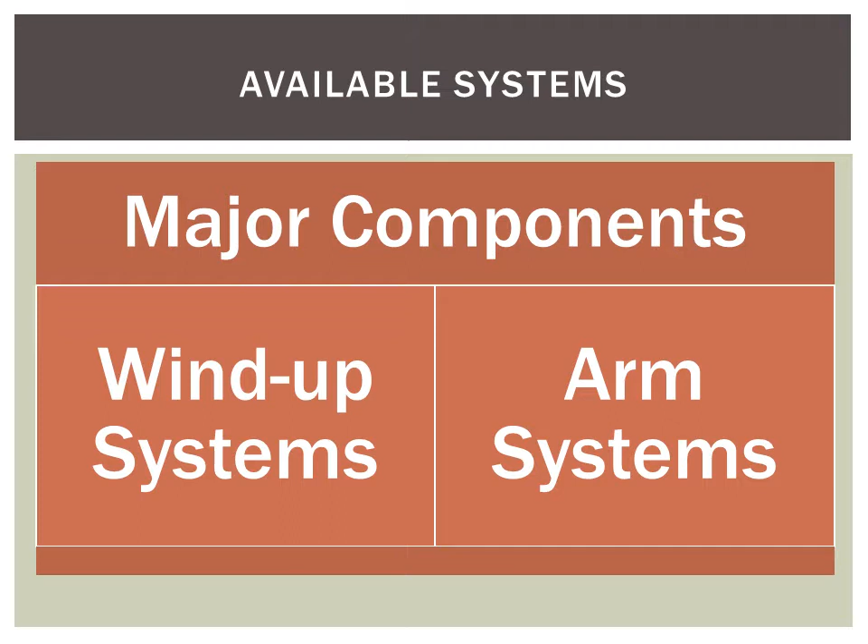As far as the arm systems go, there's steel, there's aluminum, and even different options within the aluminum systems. So that's why we try to let you take a mix and match approach where you can put together whatever combination of wind-up mechanism and arm system that you desire. All right, so the major components, first, like I said, is the wind-up system.

So over here you can see we have manual systems, and the pros to that is a lower initial cost, and there are fewer parts that could fail. But the cons of that are decreased productivity, higher long run cost, higher risk of injury to the user, and for a business owner, higher risk of lawsuits and/or workers' comp claims.

Moving up the ladder, you could upgrade to an electric system, which I would personally recommend, especially if the dump truck or dump trailer is in use all day, every day, if that's how you earn your living. The pros are increased productivity, lower long run cost. If you can pick up one extra load a day, think about the revenue that you get on your average load. Upgrading to electric will probably pay for itself in just a number of weeks. So it should have a high return on investment.

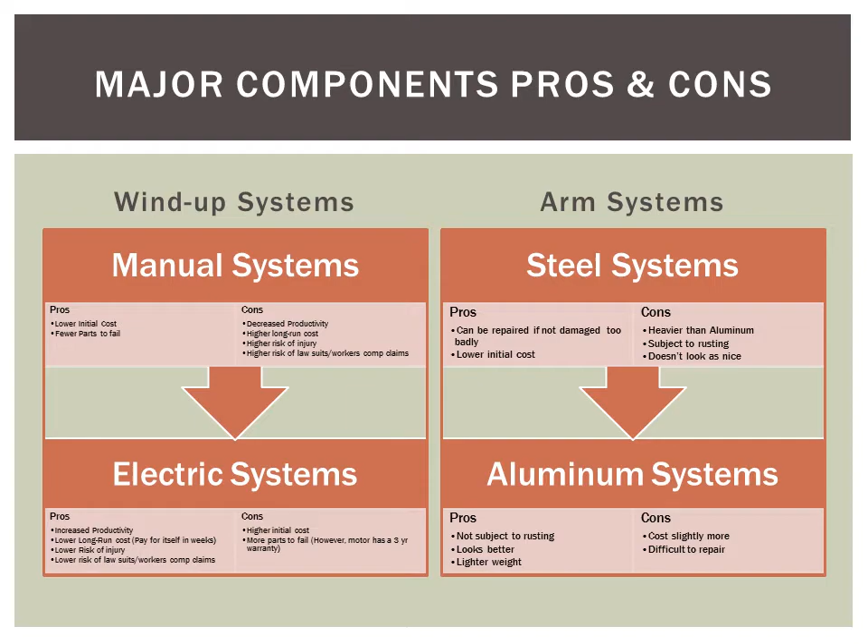The aluminum systems, which would be my recommendation in most cases, are not subject to rusting. It looks sharper on your truck, and that's the image that you present to your customers and to the public. And it's lighter weight. The drawbacks would be it costs slightly more on the front end, and they're difficult to repair if they get damaged. But choosing the right system can help avoid any damage to begin with.

An expansion of our major categories: at the top left quadrant here, you'll see the manual systems. You have our 1200, which you'll see in a subsequent slide. That and the 1500 are just basic wind-up systems. I'll go over the differences a little bit later. The 1600 is similar to the 1500, but it has a chain and it drops down and you can use it from the ground. The 1700 is your window shade type unit for people who prefer those kind of units.

Your electric systems are in the lower left-hand quadrant here. You have the 2600, which is your basic electric system for small to medium-sized dump bodies, and then you have your 3500 and 3800. On the arm systems, in the upper right quadrant here, we have two options. They're both robust steel systems that we have been selling for many, many years. We've been selling this system or something similar to it for probably a couple of decades now.

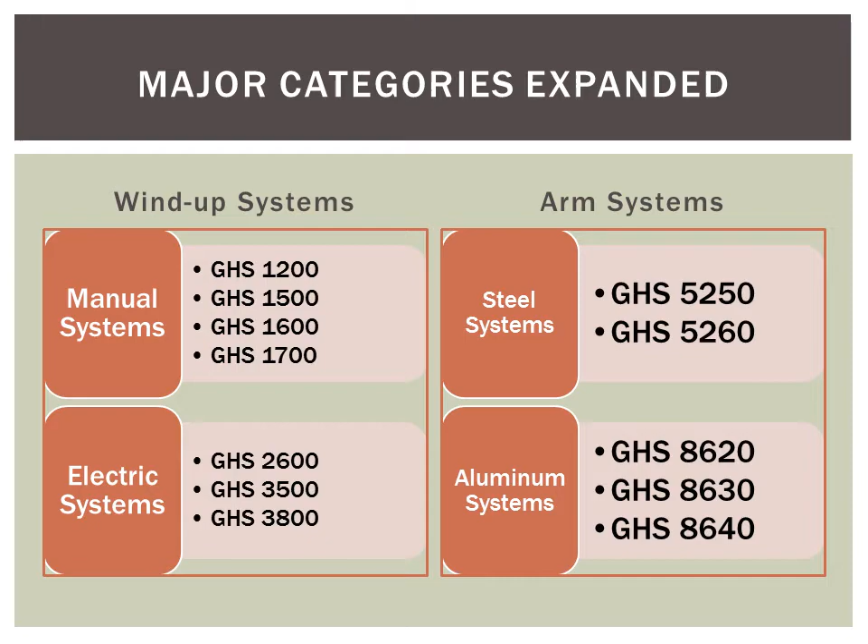So first we're going to cover the front wind-up mechanism for your tarp wind-up system. First here we have the GHS 1200. It's a manual wind-up system. You will see here that it has no sprocket or pawl, or dog as some people call it. This is a very basic system for like a landscape trailer.

It's not meant to be used with an arm system that's spring loaded because it doesn't have the sprocket and dog. The handle, which you see here, can do what they call freewheel and sort of spin around when the tarp's being pulled off. And that can be a little bit of a hazard. So for that reason, I would not recommend this for use with an arm system, but just like a landscape trailer.

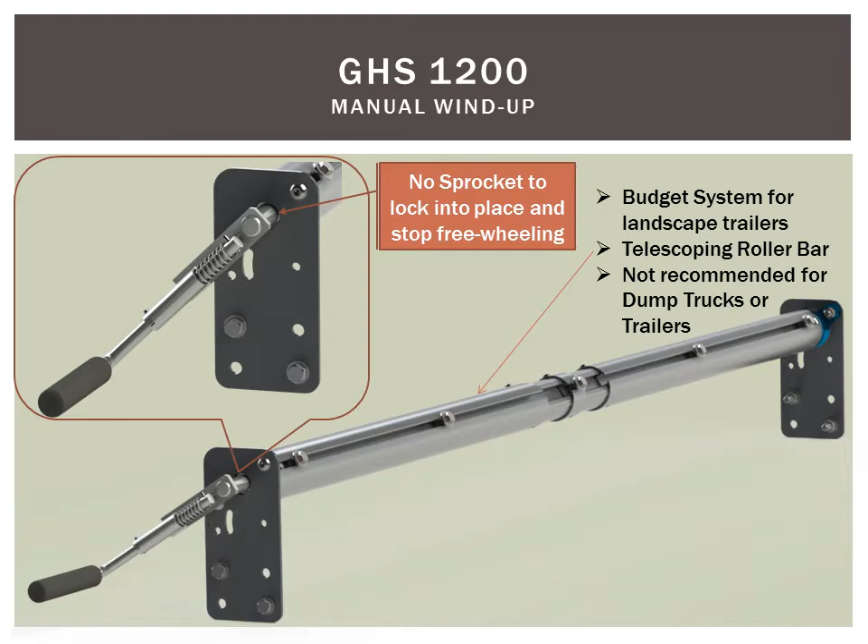Next, you have the GHS 1500. This, in my opinion, would be recommended for people with trucks that don't get all day, everyday use. Maybe they're farms or something, and they use the truck 4 or 5 times a week.

You wouldn't want to be cheap on the front end only to cost yourself a lot more in operating cost in the long run. So again, going with an electric system for something that's used very often is going to have a payback. It's going to save your labor, because the driver doesn't have to climb up on the truck every time and manually roll the system up, and avoid potential injuries and so forth.

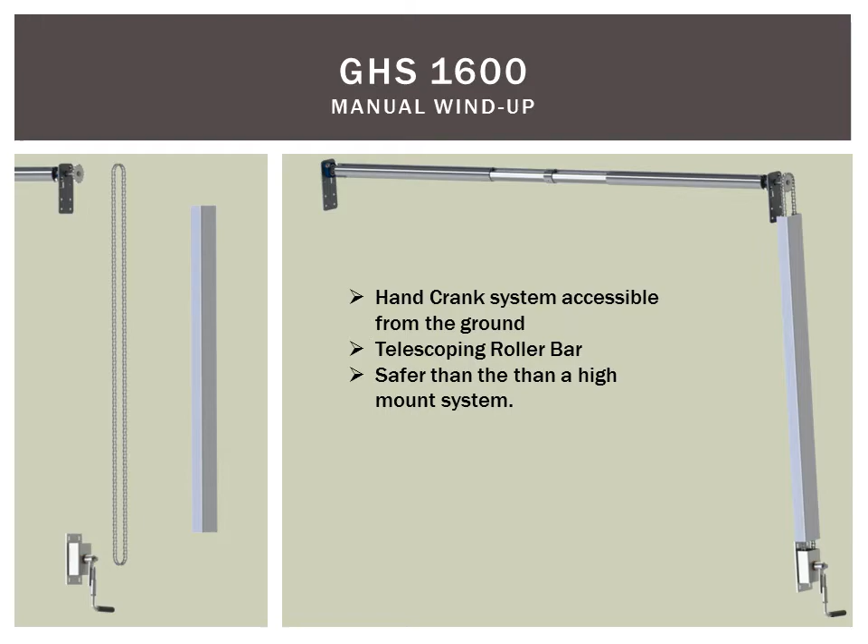You'll see on the right hand side more of how it looks when it's assembled, and there's a chain cover there that protects the driver from an open chain that could grab parts of their clothing or what have you. The 1600 is a good manual system, a good choice as well, a good little upgrade from the 1500.

The last manual system that I'm going to show you today is our GHS 1700. It's a window shade system for people who want that kind of system. It's a basic window shade type system. It's not one of our top selling items, but some people prefer this. So we wanted to make that available for the companies that decided that's what they wanted.

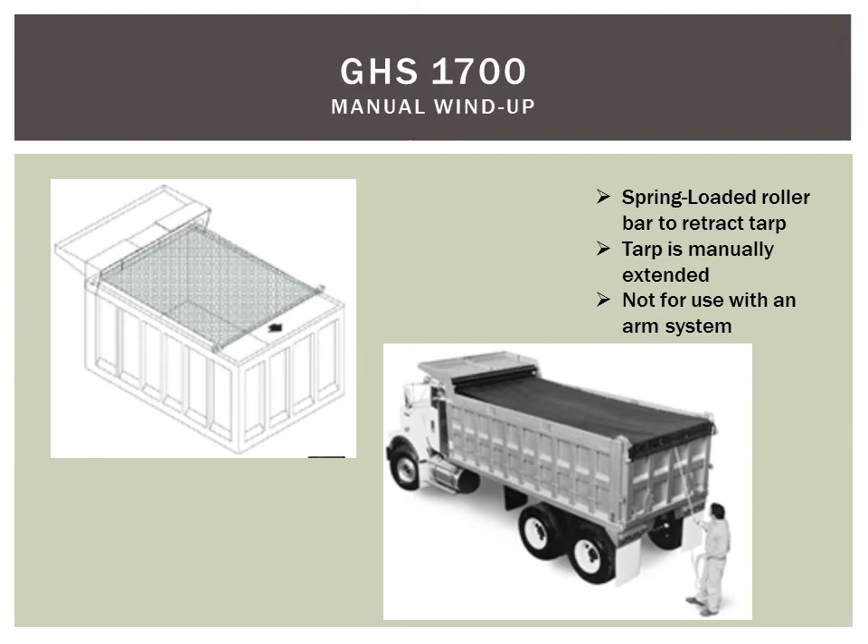Next, our most popular electric system. This electric system is for steel systems up to 26 feet long, or aluminum systems up to 30 feet long. You can see on all of our systems, even the 1200, 1500, and the 1600, as well as our electric systems, we have what we call the ETA bar, and it is a telescoping bar. And if you are the one installing this, or if your customers are installing this, that is a time saver and sort of a guarantee against a miscut.

In the old days, we had more of a solid aluminum bar, and some companies still offer systems that are that way, but if you miscut that, once you cut it off, you can't add it back on. So this telescoping system saves people installing time, and it's sort of a safety mechanism to prevent overcutting. It makes shipping easier, makes installation quicker. It's a top-notch system. You can see it's grooved, and you got your bolts there that you will install your tarp on.

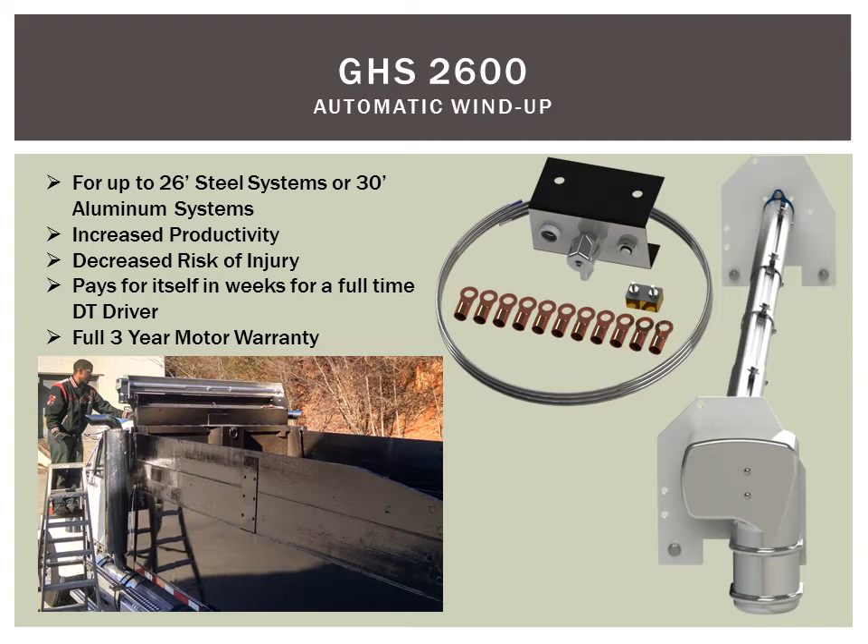So, moving on, our GHS 3500 is for trucks with longer bodies. For instance, aluminum systems over 30 feet. It's got a 900 watt motor instead of a 600 watt motor. By the way, both of our motors have a 3-year non-prorated warranty. They have a substantial amount of torque, and that's done by virtue of an appropriate gear ratio, which allows the system to get the maximum amount of torque for that motor.

So the difference between the GHS 3500 and a 2600 is that it has a 900 watt motor instead of a 600 watt motor, and a little bit heavier gauge wire and a little bit more wire because it's typically going on longer systems. It also costs a little bit more, obviously. Copper is a huge component of the wire, and it takes a lot of wire. This is a system that we designed. We didn't cut any corners. We tried to choose the best option at every juncture, and we've had a lot of positive feedback on the system.

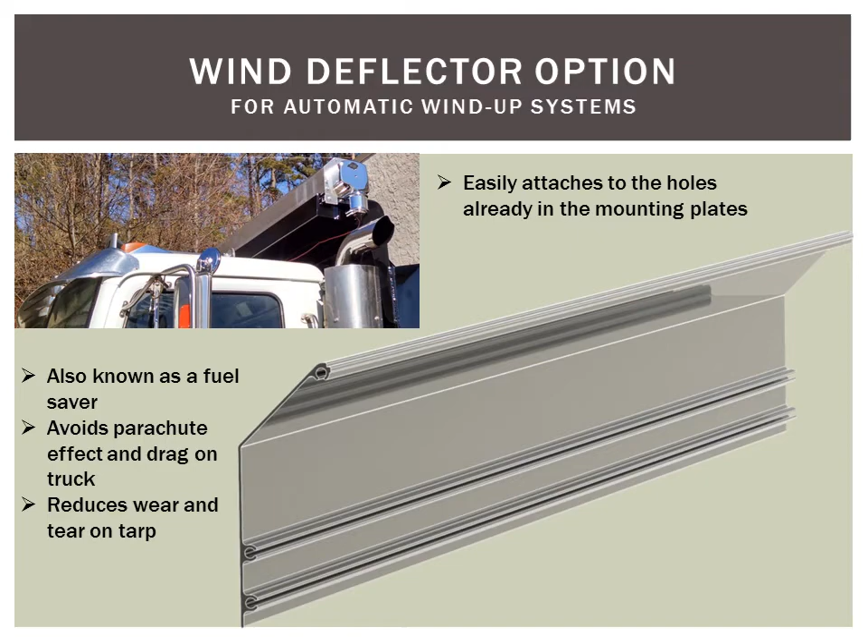It is a 3-spring system, which would have a narrower profile than, say, a 5-spring system, which might come out a little bit further. There are telescoping arms that you can adjust. This is a good standard steel system for those people who desire a steel system.

If you have frequent problems with loaders or what have you bumping into your arms, and you have the manpower and the time to straighten bent arms or weld them, or if you prefer steel for whatever reason, this is our steel arm system. We give you options. Some people prefer steel, some people prefer aluminum.

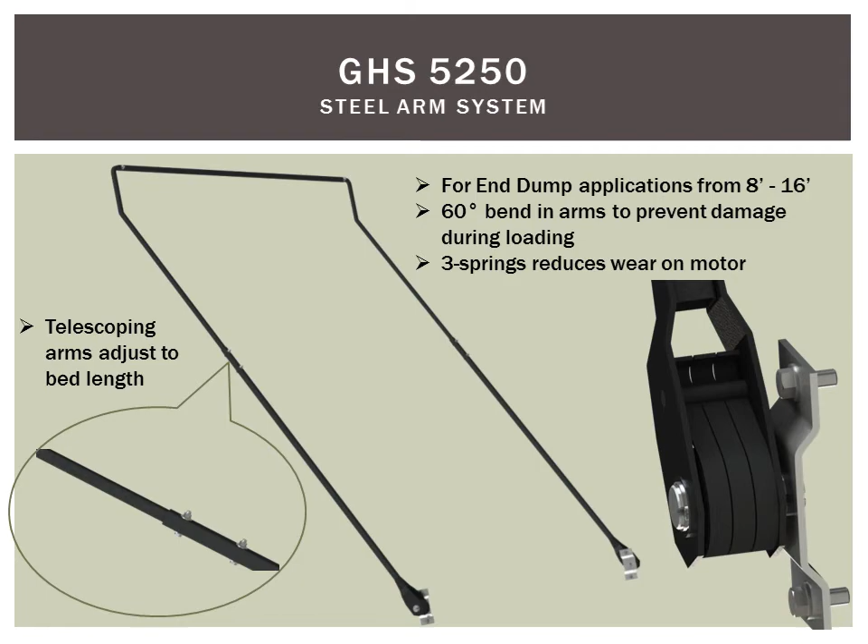The 5260 is for applications from 16 to 24 feet. As you can see here, it is a 5-spring system. It needs the extra springs to carry the arms, the longer, heavier arms, back and forth. So it's going to stick out a little bit further than a 3-spring system. The arms are also bent, as these typically go on end dump trucks that can often have a cab shield that has a drop. I'll go over that in a minute.

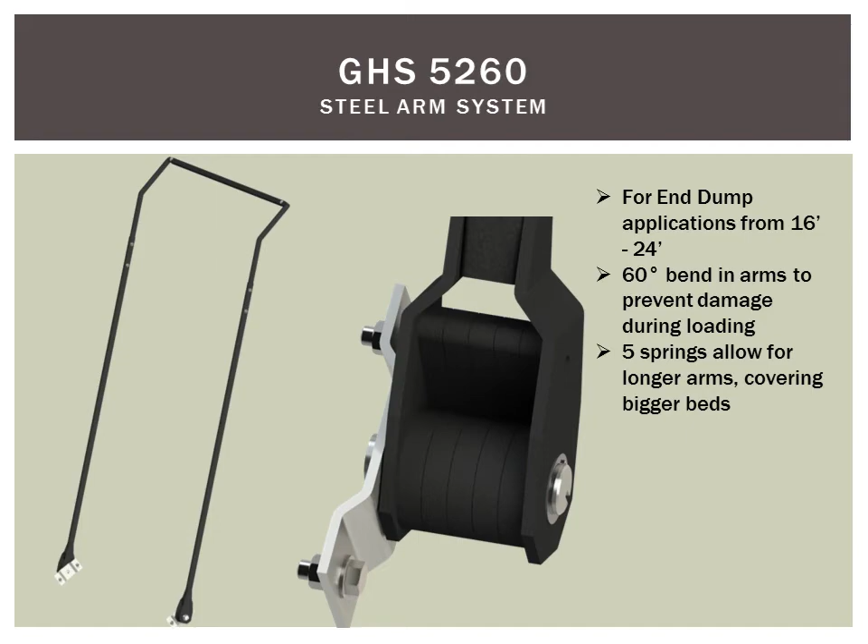On our aluminum system, you have our 8600 series. You have the 8620, 30, and 40, which is for the different body lengths, 20 feet, 30 feet, and 40 feet. You can get straight arms, or you can get bent arms. Unless your cab shield is higher than the sidewalls of your dump bed, bent arms are not necessary and will probably increase shipping cost.

On most dump trailers, or a lot of dump trucks, the front of the trailer is level with the sides of the trailer, so there's no exposed part of a dump truck arm. On dump truck bodies where the sidewall or the board that people put on top is relatively close to the cab shield, you could probably put a straight arm system on it and be fine as well.

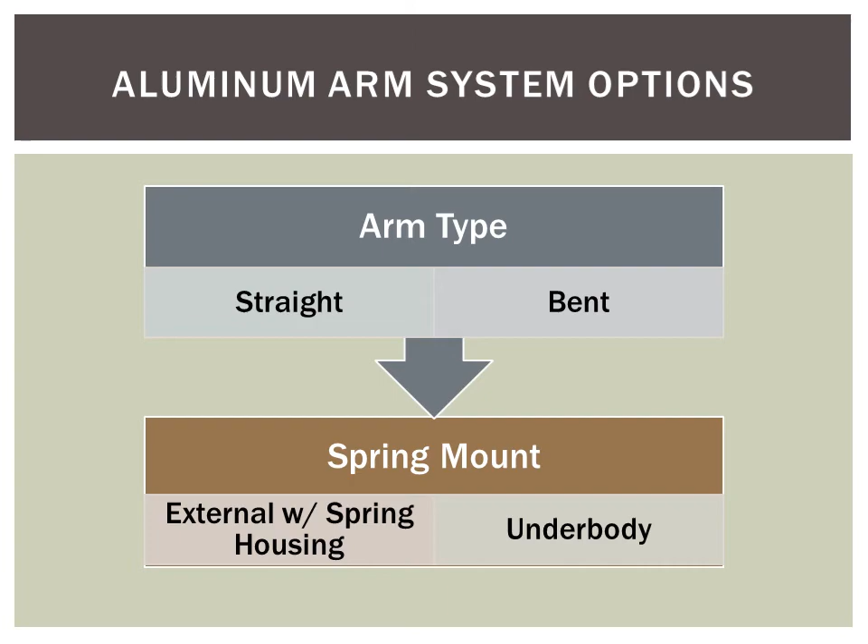The spring mount options, which you'll see more about later as well: the typical system is an external spring mount. Ours has a spring housing on it to protect the springs from dirt and grime, stuff like that. The other option that is likely the superior option is an underbody spring system. Now that is going to cost a little bit more, but the springs are tucked under the body and they're out of the way. Let's move on and you'll see more of what I'm talking about in graphics on subsequent slides.

Okay, this is our 8620, which I'm very proud of. It was engineered in-house by us. We do all kinds of things like include the brass ring to reduce friction, which alleviates some of the load on the springs and the motor, and it's the little details that make our systems better. We have a custom EPDM rubber bumper there that is thicker where it needs to be thicker. The same with the profile.

If you looked at a cross section of this arm, the edges of the arm that receive most of the abuse and where all the stress is are designed to be thicker. And that's a difference in an engineered tarp system like ours, and some of our competitors do the same thing, but we've seen other systems out there that just use some sort of steel or aluminum round tubing, and it's a uniform thickness all the way around. And it just looks like they went to the hardware store and put together a system from basic materials available at a hardware store without giving a lot of thought to the actual application.

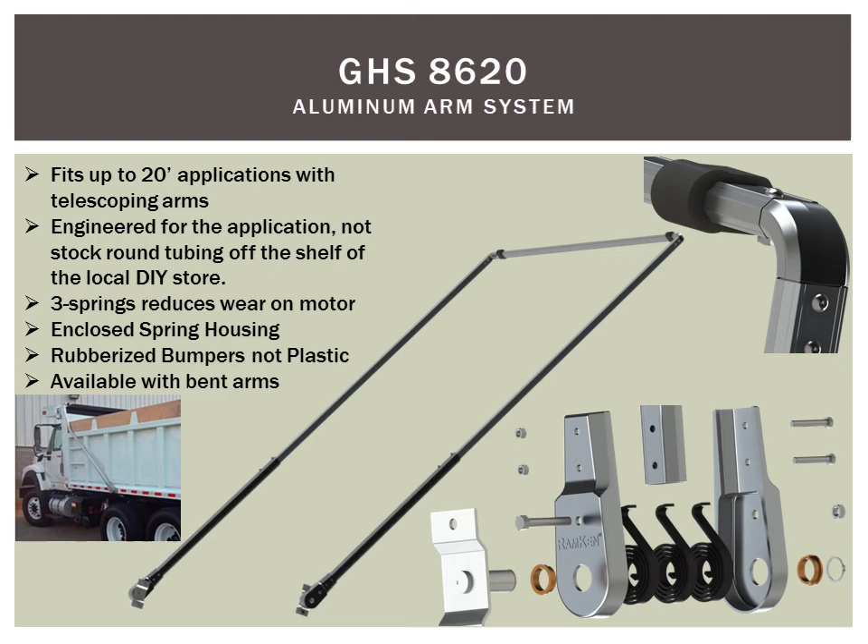All right, let's move on to the 8630. Our 8630 is a 5-spring unit, you can see here, and it fits 20 to 30 foot bodies. You can see here there's a graphical representation of the 8630 being longer than the 8620. If you, for some reason, need a 4-spring system and not 5, you can just leave one spring out. There's enough tension when these springs are loaded and the system's installed on the truck that the springs aren't going to slide back and forth. It's not going anywhere. So this can actually work as a 5 or a 4-spring application if that's what you need. So the 8630 again is just a longer version of the 8620.

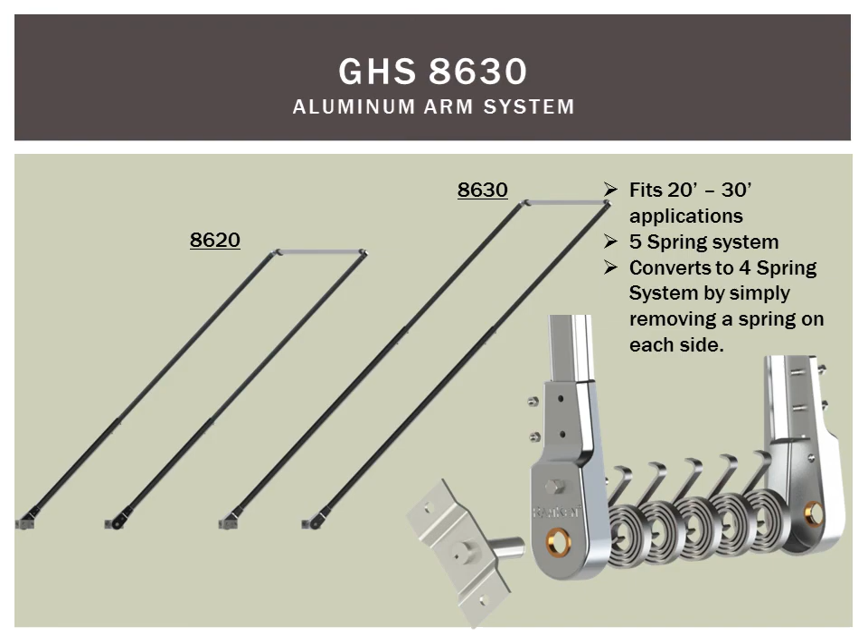Also, while I'm on the cheaper stuff, the aluminum alloy that we use is a superior alloy to what a lot of people use. What I'm trying to say is all aluminum isn't the same. We use an alloy that's much better than what some people use, and we had lower cost options available to us, but we chose an alloy that was superior and was a better fit for the application. We weren't interested just in taking the user's money on the front end and letting them worry about any problems afterwards.

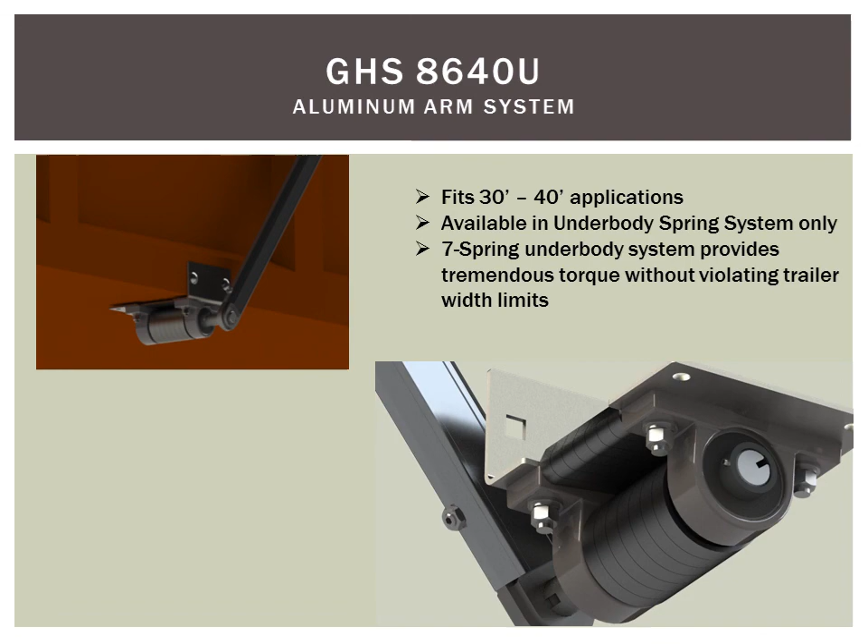That concludes the basic introduction to Glenn Harp and Sons, or Harps Tarps dump truck wind-up systems. I hope this has been informative, and I hope you see all the value that we've tried to add. That's our niche. We try to provide the most value in the market. So it's that proper balance between functionality and quality, but yet at a competitive price.